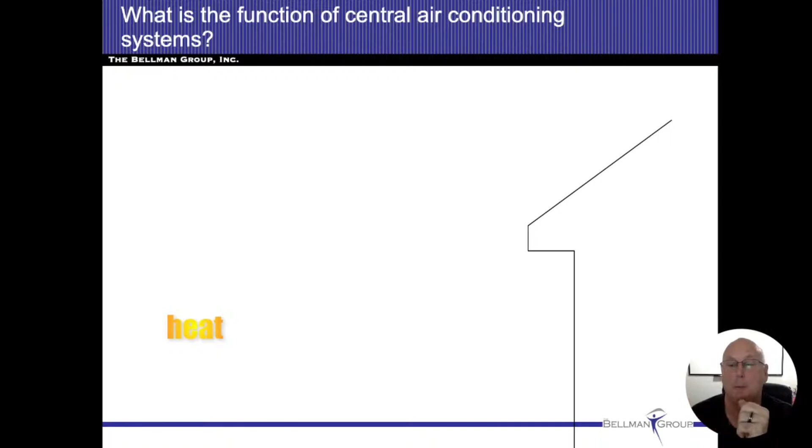So a lot of what happens with air conditioning, the main goal is we want to absorb the heat from inside the house, and then we want to move that heat to the outside of the house, and the result of that is going to end up being we feel cool inside the house. All right, so how do we do that? We have to do a little bit of science.

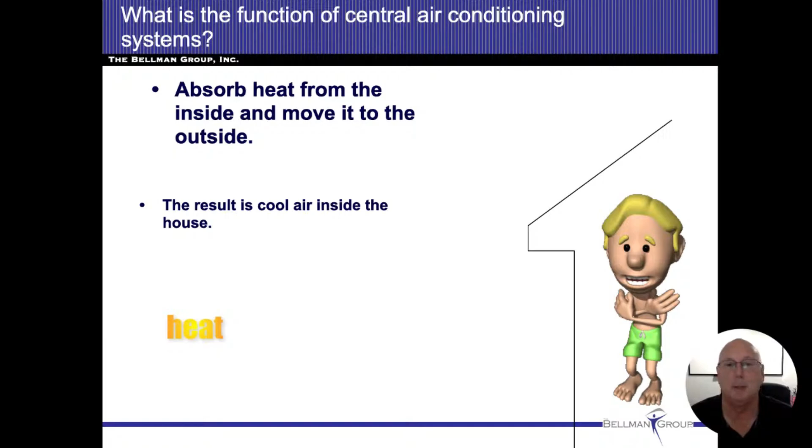Believe it or not, the guy that invented air conditioning, I believe his last name is Carrier. So, obviously they named the air conditioning company after him. I believe his first name is Marcus. Marcus Carrier. Either that or it was a safety for the Bears. One of the two. But either way, we'll keep working.

So heat does move. Heat is always moving from whatever the warmest object is to the coolest object. The bigger the separation between the temperatures, the faster the heat's going to move.

If I am in a room of 75 degrees and I have a glass of ice water with me, the ice water is going to be 32 degrees. But that heat, that's 75 degrees in the room, is going to continuously be absorbed into the liquid until that ice is completely a liquid. Then that's also going to start raising in temperature until both temperatures are going to be the same. So either the liquid's going to end up being 75 degrees or so forth.

Now the second one is kind of important. We talk about BTUs, and I do want you to be able to write that down real quick. I'll come back to this screen.

Oh, Willis Carrier, thank you Mark. Sorry, so Marcus Carrier was the Bears player. So Willis Carrier is the inventor of air conditioning. Oops, that's okay.

Let's. Oops, I did not want to do that. Sorry guys, I'm having... there we go, all right.

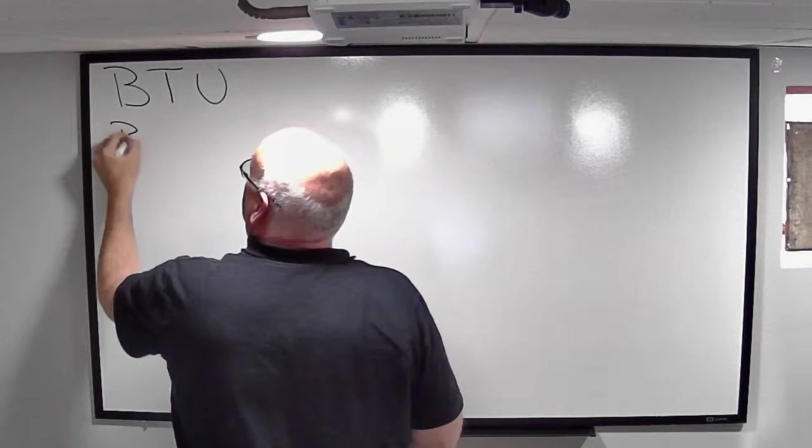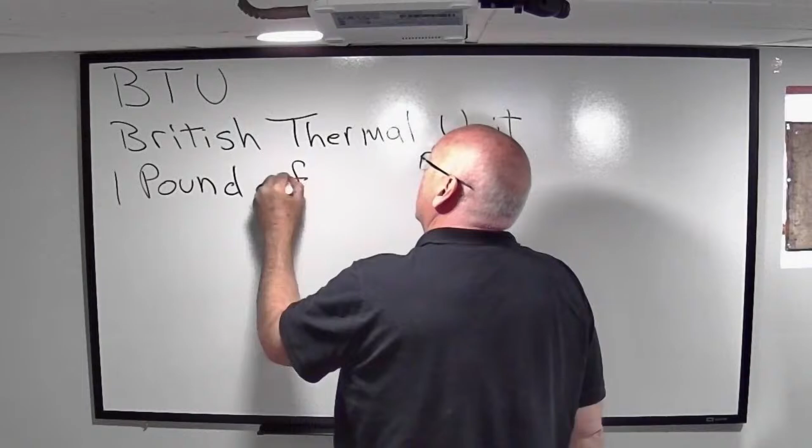So let's start writing a few notes on here. All right, we do need to know the definition of BTU. That stands for British Thermal Unit. I guess I would have been better off going up and down on this one. But British Thermal Unit is the amount of energy, whether it be coal, gas, water, whatever it is, that's required to raise 1 pound of water 1 degree Fahrenheit.

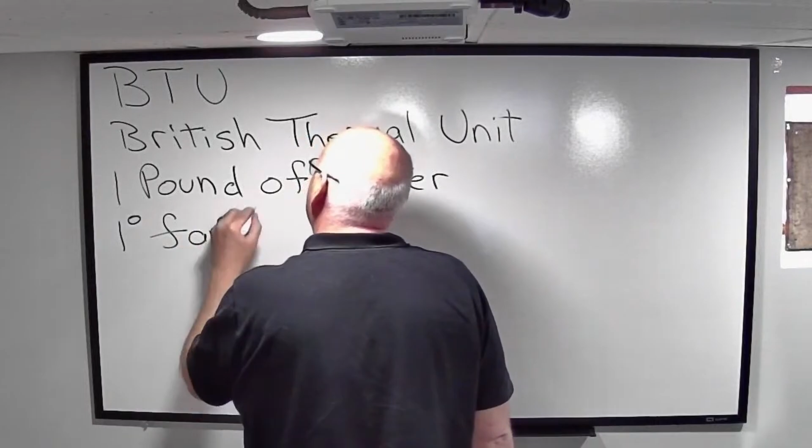And I know I'm going to spell Fahrenheit wrong. Well, maybe not. 1 degree Fahrenheit. So I usually go through a little bit of a thing here where, let's see, I'm going to get me back on the screen here. There we go.

All right, so I usually go through a little bit of a thing where: how much energy are we needing when we start raising temperatures of water? And a lot of these questions I keep asking are, if I had 1 pound of water sitting in front of me and I want to put that on a stove and put a fire on it, how much gas am I going to need to raise that temperature 50 degrees?

FAH. Mark, I'm going to stop liking you real soon. But anyway, I hope you're giggling at that.

So 1 pound of water, 1 degree Fahrenheit. If I have 1 pound of water that's 50 degrees, and I want to raise it and make it 100 degrees, I hope we're realizing I have to add 50 BTUs to that. And that's how long the fire has to burn and how much gas needs to be used.

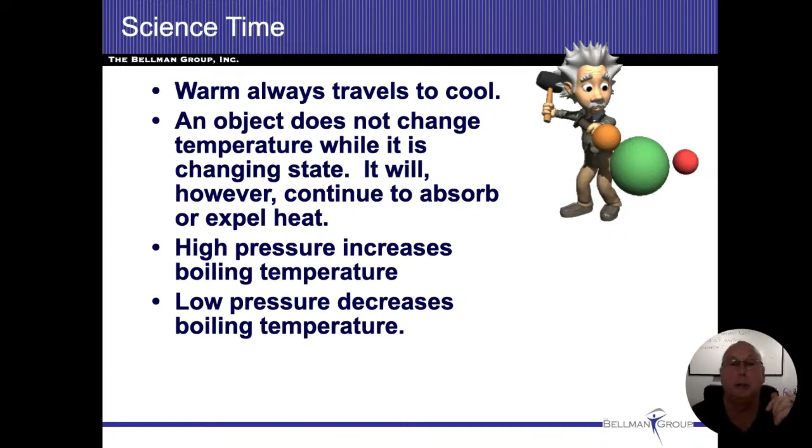All of these items work with our air conditioning system. In a nutshell, that's how the refrigerant works.

So we're going to bring a cold liquid inside the house. Remember, we have to absorb the heat. So if we bring a cold liquid inside the house and blow warm air over it, we're going to absorb that heat. Heat travels from hot to cold. So if it's warmer inside the house than in the liquid, heat is going to move through the radiator coils into the refrigerant and convert that refrigerant from a liquid to a gas. As it converts from a liquid to a gas, it has to absorb a tremendous amount of BTUs. And I need you to remember that part - it absorbs a tremendous amount of BTUs.

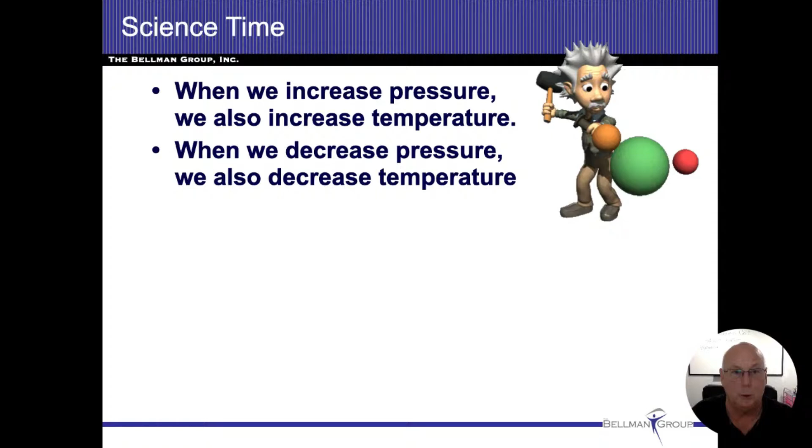And even on the other end, when we're discharging the heat, we're switching from a gas to a liquid. When we switch from a gas to a liquid, we're discharging a tremendous amount of BTUs. So in short, this is our typical air conditioning system. I'd like you to realize there are basically 4 different components that come into play here. So let's start over here at the compressor.

We'll start at the compressor. You can see that on the lower left-hand side. So inside we have our furnace, our air handler. You can see our air conditioning coil on top.

I know I put the blue flames on there. I'm sorry, I just thought they were cute, so I put them in there. But for the most part, the furnace isn't going to be running when the air conditioning is running. It kind of defeats the purpose.

So we'll start at the compressor. That compressor is going to have a gas, and it's going to compress the gas. Once we compress the gas, we raise the temperature, usually up to somewhere around 150 degrees. If it's really hot outside, let's say 100 degrees, the refrigerant's going to be 150 degrees and the outside air is going to be 100 degrees.

So the heat is going to be transferring from the refrigerant to the outside air. As we go through these coils up here, that discharges the heat under high pressure. So the boiling point is up at the top, and it's going to convert to a liquid. It's still going to remain high pressure, but it's going to end up being a liquid.

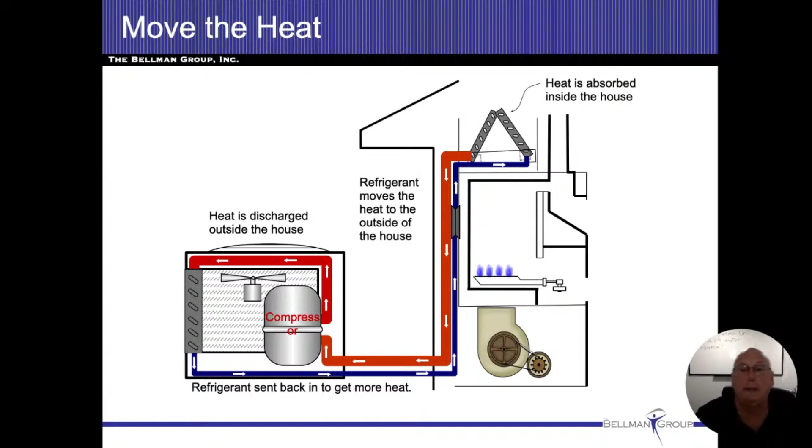But I think it's still a good idea to break down the air conditioning system and just get a clearer understanding. So how do we get the heat basically from the room air or the outside air - how do we get it to the refrigerant?

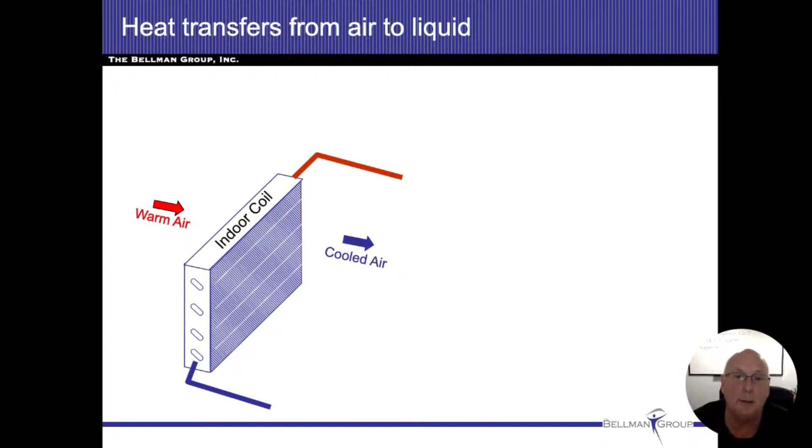So if we look at the outside coil, you can actually see these fins because they're out in the open. They're very tight together, thin pieces of metal attached to the coils. Those coils run back and forth throughout everything, and the fan blows the air over them. So these big, wide, narrow pieces of metal let air flow in between them, able to absorb a tremendous amount of heat as the air passes through, or discharge the heat as well. So it makes it pretty efficient.

So that's how we're absorbing the heat and getting it into the refrigerant. The more times that coil passes over more air, the more heat it can either absorb or discharge. At this point, we're talking about warm air going over the coil - it ends up absorbing the heat into the coil, and then cool air is what we feel coming through the house.

The problem with these coils - these fins - is they're so close together that there's always condensation forming on them. If we let dust get past the filter and onto these coils, it starts creating a layer of mud. And once that layer of mud is created, especially with forced air furnaces that we have in the Chicagoland area, we really don't have access to the top side or bottom side of these fins to clean them.

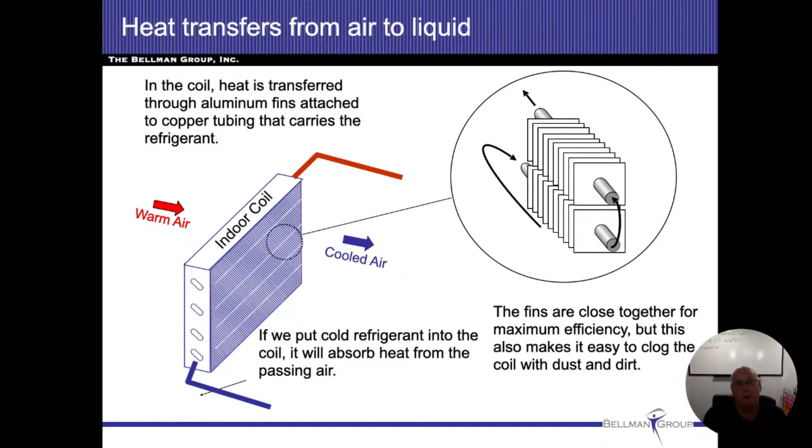So now we're going to have to hire somebody to basically remove the coil, get to the underside, and clean all these things just to let the air pass through. Because if the air cannot pass through, then there's no way to absorb the heat from the house and put it into the refrigerant - everything just stands by there.

A key phrase I want you to be aware of, please write it down. It's called the latent heat of vaporization. We actually talked about it already. That's the latent heat, the process of absorbing or discharging significant amounts of heat when changing state.

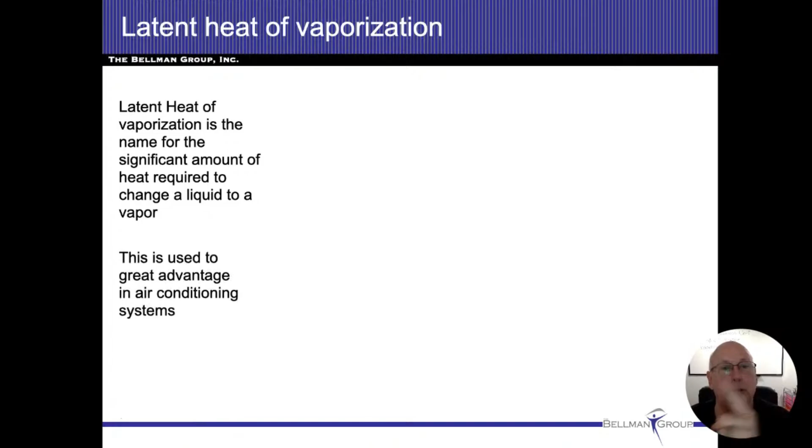Going back to the BTUs, we talked before about if I add heat to something, it changes from a liquid to a gas. If I discharge heat or remove heat from something, it changes from a gas to a liquid. So the first one, going from a liquid to a gas, that's latent heat of vaporization. It takes about 1,000 BTUs to take that 1 pound of water and completely convert it over to a gas.

The other term I want you to know is latent heat of condensation. Latent heat of vaporization is the amount of BTU transfer when I go from a liquid to a gas. Latent heat of condensation is the amount of heat transfer going from a gas to a liquid. It's a tremendous amount of heat that we can absorb or discharge, but I need you to know when we're absorbing and when we're discharging.

For me, it was always easiest to remember that pot of water on the stove. If I got a fire underneath that stove, fire underneath the water, that water is absorbing heat. As I'm absorbing heat, I'm changing from a liquid to a gas. And then vice versa, if I'm removing the heat, I'm going from a gas to a liquid.

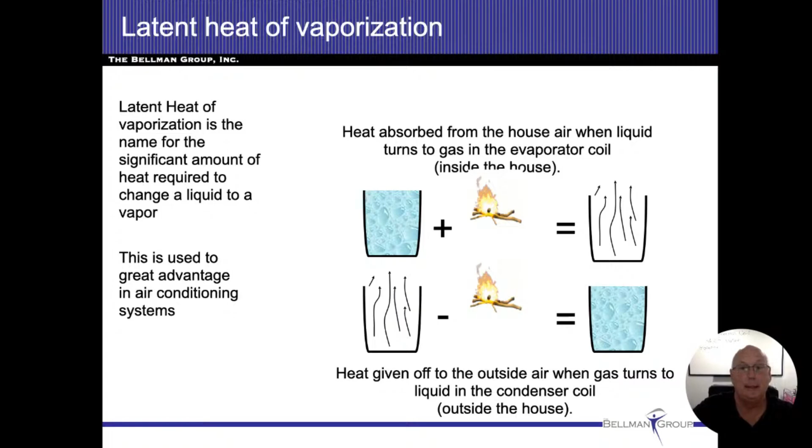Latent heat of vaporization and latent heat of condensation. The evaporator coil, we really give two names in air conditioning: a condensing coil and an evaporator coil. If you think about what I just talked about, when we're evaporating, we're changing from a liquid to a gas. And when we're condensing, we're changing from a gas to a liquid.

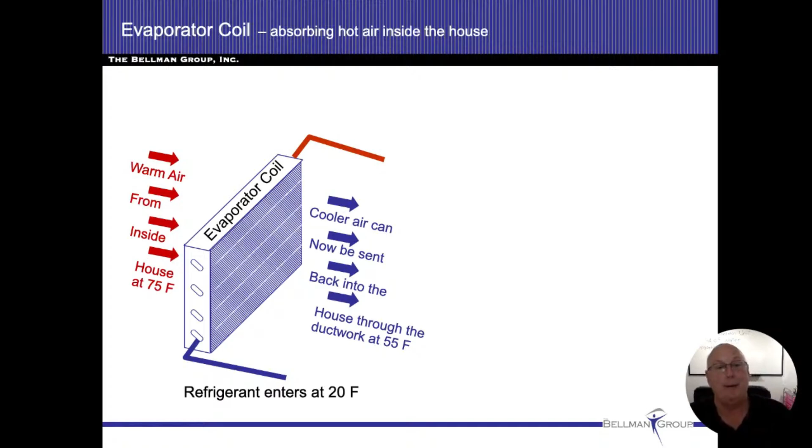So refrigerant enters at about 20 degrees Fahrenheit. I think that was the first number I threw out there. We're going to assume that the house is somewhere around 75 degrees. This is a simple test we can do as well. It's going to change from a liquid to a gas, and as it changes, it's going to absorb the heat in the air that is blowing over the coils where it comes through. So it comes in as a liquid at 20 degrees, absorbs heat from the house, and then the refrigerant ends up leaving as a gas roughly about 50 degrees.

Now going back and showing the lines again, we didn't really talk about the line set, but if you look at your air conditioning system, you're going to see two tubes out there. We call that the line set. One is going to be skinny and one is going to be fat, or bigger. The bigger line is also known as our gas line or our suction line or our low pressure line. That one's going to be cold to the touch. We're saying it's going to be around 50 degrees when we touch it. So if our hand is on it and we feel it, it's actually going to be pretty cool.

Where it's a liquid coming in here is going to be after the restricting device. That's going to lower the temperature down to 20 degrees. That's not going to be an area that we can actually touch. That's going to be inside the plenum or the air conditioning coil. Typically it's going to be the capillary tubes, but we'll get to that in a little bit.

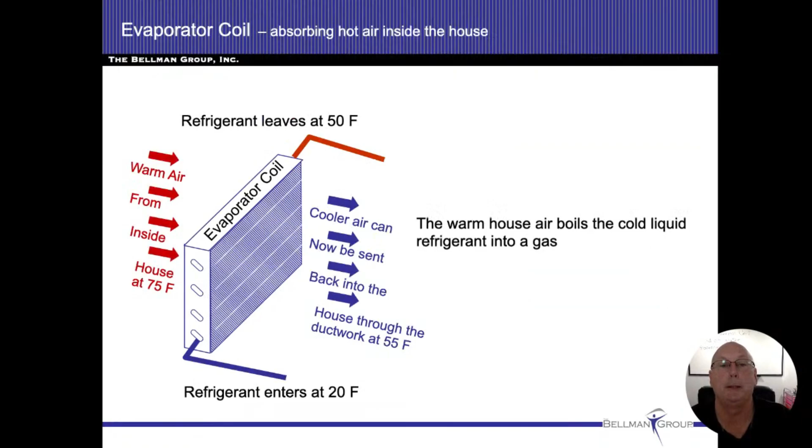So let's go back here one more time. I want to pop those words back up there again and make sure we got everything covered. So warm house air boils the cold liquid. We chatted on that. Large amount of heat is absorbed. That's a test question, I need you to be aware of that. The heat that's being absorbed is called latent heat, and we're going to refer to this process as latent heat of vaporization. When we're discharging the heat, as we're changing state, that's latent heat of condensation. And again, it does make for a very efficient heat transfer.

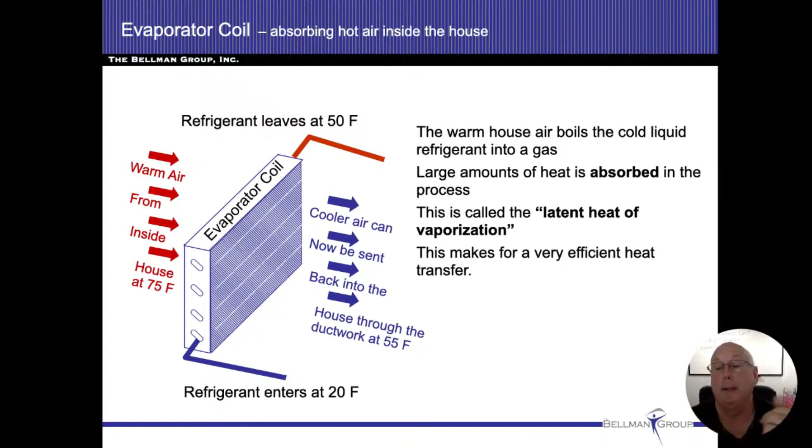So we have our indoor coil. We were just talking about that. We left the indoor coil as a gas, and it's 50 degrees. We said heat travels from hot to cold. So if it's 100 degrees outside and my refrigerant is 50 degrees, the outside air is still going to be putting heat into the refrigerant.

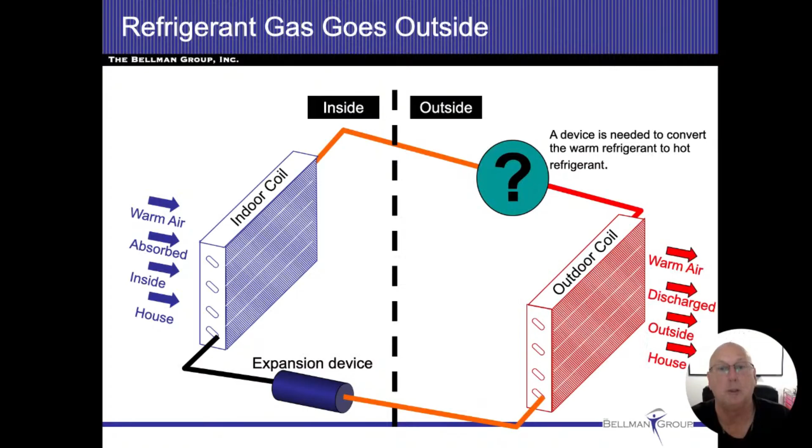So I need to do something with that gas refrigerant to increase the temperature of it. We mentioned earlier in our science discussion that when we increase the pressure, we're also increasing the temperature. So this is just an old piston-shaped pump here.

Right now we use scroll compressors in the system. But if it comes in as a gas, the only thing that can go through these air compressors is a gas, and we're going to hit that with the temperatures we check in air conditioning in a bit. So we can only send gas through the air compressor.

It comes in at 50 degrees, but once I pressurize the system, it's going to leave at about 150 degrees. So just by pressurizing that gas, we increase the temperature by 100 degrees. Now it's warmer than what it is outside, and this air compressor is located in the outside compressor cabinet, or condensing cabinet. It has a couple different names, but it's really the same thing. So the air compressor is in the outside metal cabinet.

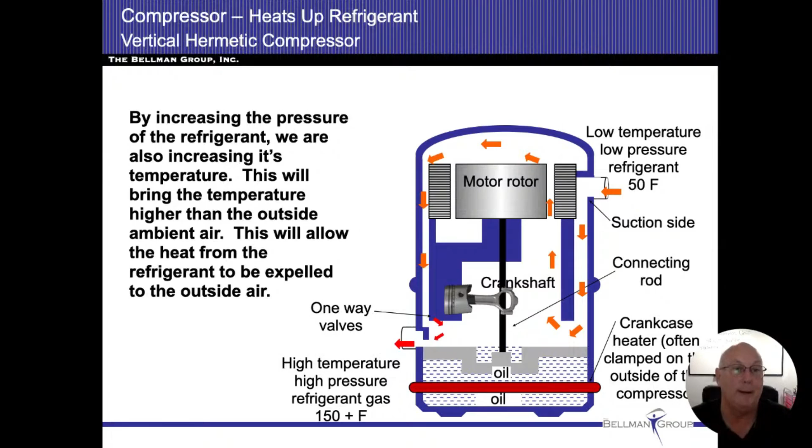As it leaves there, it's 150 degrees. When it's 150 degrees, it's warmer than the outside air. So as we run it through all the coils and fins that are outside, we're going to start discharging heat to the outdoors. So as we discharge the heat, it comes in at 150. Here we're saying it's 85. Outside air is going to probably go up about 15 degrees.

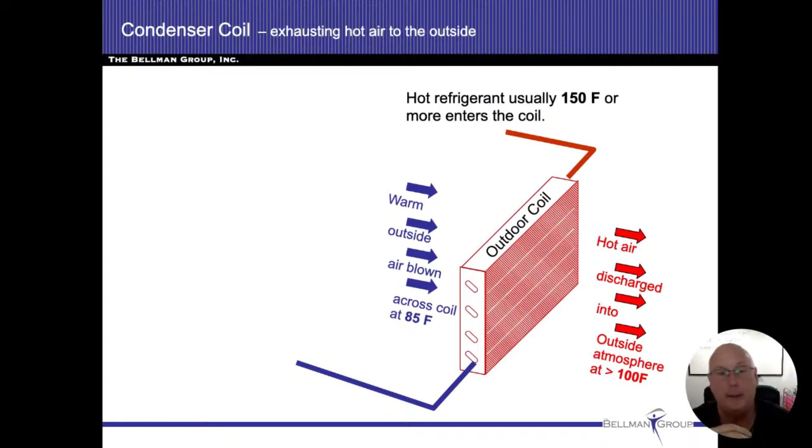And I did leave that off indoors. I want you to remember that air conditioning systems typically have a 15 to 20 degree temperature drop. That's a real simple, easy test we could do to see if these things are basically doing what they're supposed to. We turn the air conditioning on. If it's 70 degrees in the house, we should expect it to be 50 to 55 degrees on the other side of the air conditioning coil in the plenum. Anything higher or lower than that could be an issue.

High pressure liquid, because we raised the boiling point, leaves there at 100 degrees. So the skinny line is going to be warm to the touch, and then the suction line, before it goes into the cabinet, remember that 150 degrees is directly after the compressor. Before the compressor, it's 50 degrees. So what I'm able to feel is the suction line on the outside is 50 degrees, and the liquid line on the outside is typically 100 degrees.

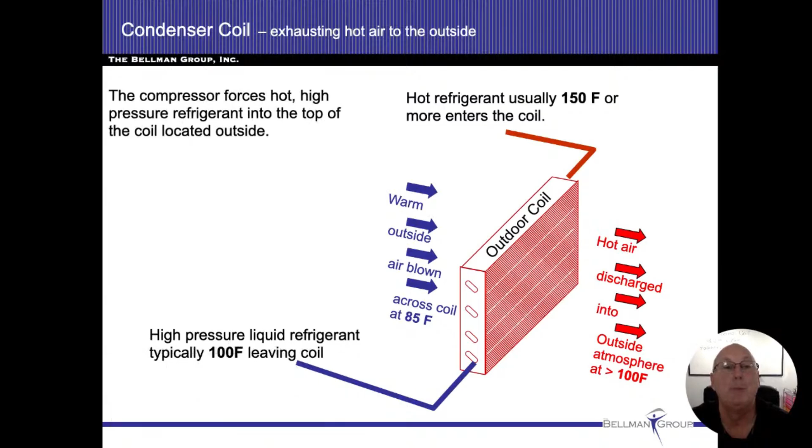This forces hot, high-pressure refrigerant to the top of the coil located outside. The refrigerant travels through the coil. The same air transfer is happening, but in this case, we're discharging heat. As I'm discharging, I'm condensing my refrigerant, changing from a gas to a liquid. And again, as I change from a gas to a liquid, I discharge a tremendous amount of heat that I had inside the refrigerant. This is called latent heat of condensation when this happens. And we're just talking about the heat transfer without the temperature change. That is latent heat.

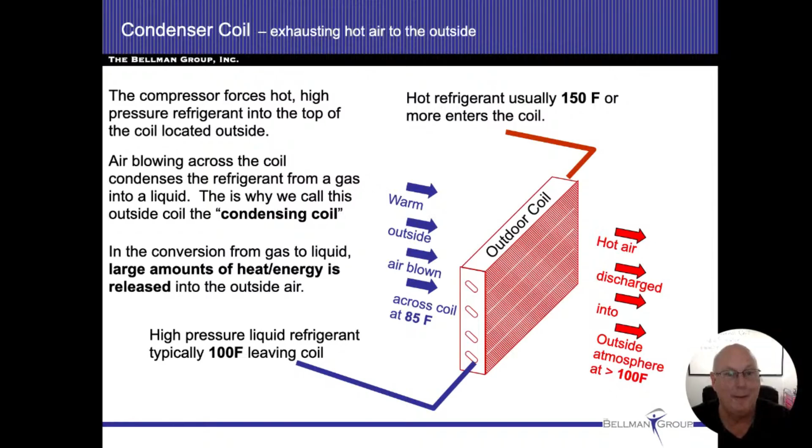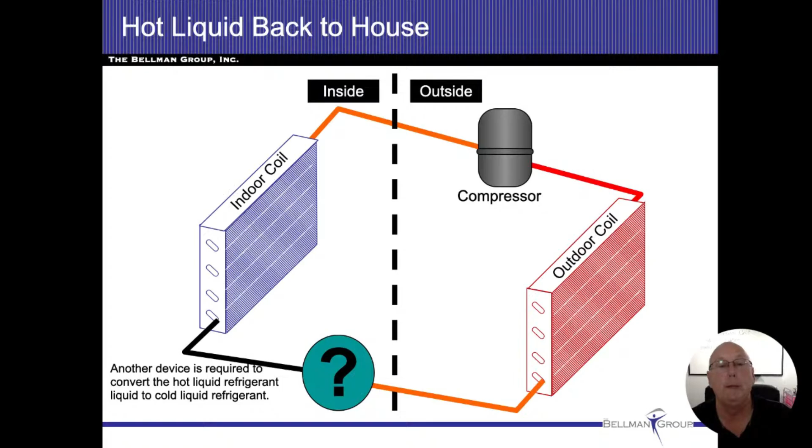So we started at our indoor coil again. We absorbed heat, we're a gas. We send the gas to the compressor. We compress it, now we make it a high temperature, high pressure gas. We blow outside air over it. We get rid of that heat. It changes back to a liquid. It's still high pressure, but now I need to lower that pressure, because when I lower that pressure, I'm going to lower the temperature as well, so I can bring a nice cold liquid into my indoor air.

So the capillary tubes, and I'll show a picture of that in a bit, are going to be our typical bottleneck, our typical restricting device or metering device. There are other ones out there, mechanical devices called TXVs, or thermal expansion valves, and I'll show you what those look like and how they work in a bit. But for now, I want to focus on the science behind the air conditioning.

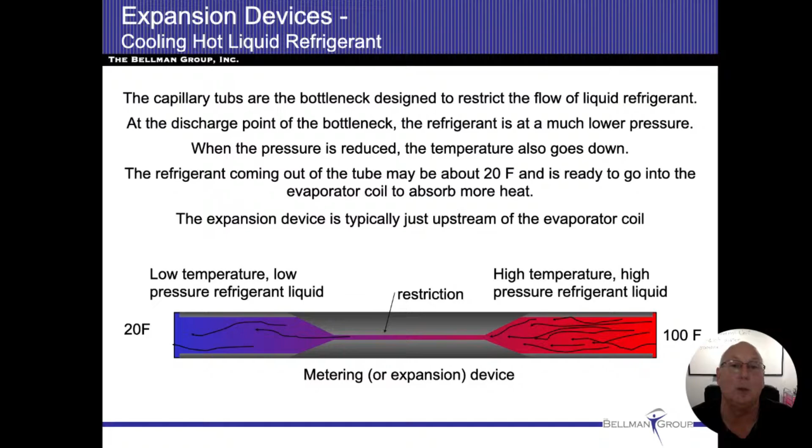So what we're doing is we're holding that pressure back, and as we hold that pressure back, we have that 100-degree temperature. Then as we let a little bit of the refrigerant out, we lower the pressure, which significantly drops the temperature as well. As we drop that temperature, that's what we're going to be sending into the air conditioning unit. So now we have a 20-degree liquid, and we're going to bring that liquid inside.

So the outside cabinet and the size of the compressor and the size of the coils have to match the indoor refrigerant coils as well. They can't be like a 4-ton unit outside and a 2-ton unit inside. They must match, otherwise they're not going to work properly.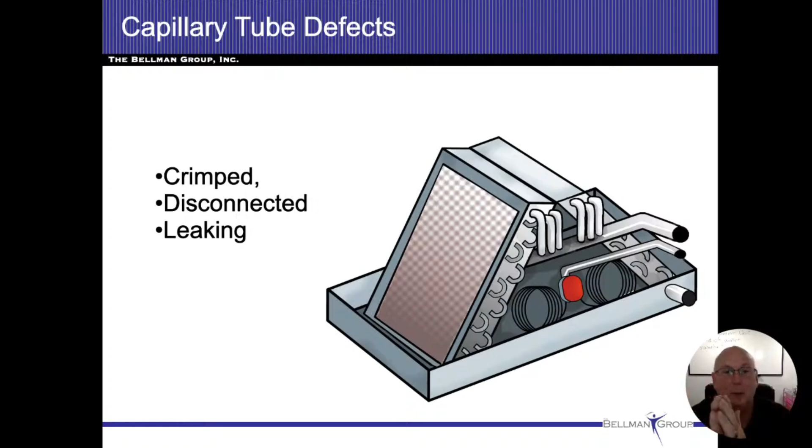So if we ever get inside, sometimes you'll see a panel on the indoor coils, so you could pull that panel off. Sometimes you can see it when you remove the humidifier, and you can look for these coils. Typically, we don't find too much going on with them. But if they're leaking, you'll see signs of oil, and we wouldn't get our temperature changes anyway, or if they're dented or damaged in any way, we should photograph them and document that as well.

Here's an actual A coil. You can see how the skinny line, we call that the liquid line, goes into those capillary tubes again. The spiraling of the capillary tubes is what's going to hold everything back. And you could see the fins.

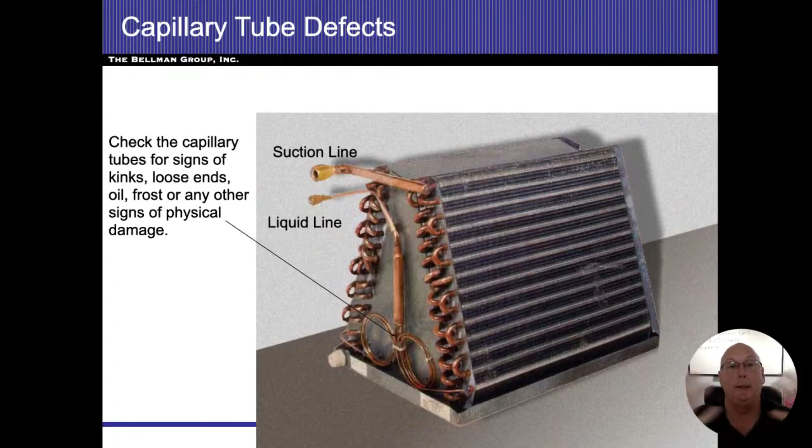I like this picture a lot because we can actually see the coils and how they're going back and forth, and the fins, how they tighten and keep the air coming through. Then it leaves through the thicker line up there, called the suction line. So it comes in as a liquid and leaves as a gas, as we absorb all the heat that's inside the house and put it into the refrigerant.

We're going to have our indoor coils and our outdoor coils. We're going to have a compressor, so something to increase the pressure, and then something, whether it's the capillary tubes or a TXV, for a generic term we're going to call it an expansion device. So we're going to have something that's going to lower the pressure, or a metering device. I like that as more of a generic term as well.

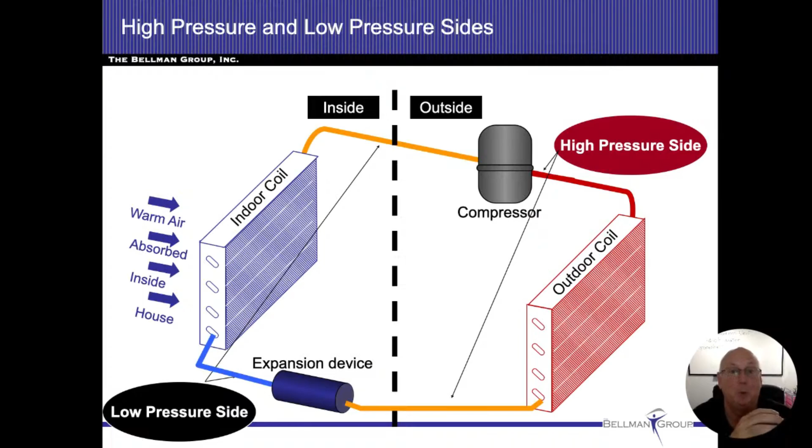So I'm expecting you to know when it's high pressure gas, when it's high temperature gas, when it's high pressure liquid, when it's medium temperature high pressure liquid, and then after the expansion valve, we're going to be low temperature, low pressure liquid. As we go through the coil and change to a gas, we're going to be medium temperature, low pressure gas. Then we hit our compressor again: high temperature, high pressure, still a gas, and it changes state in the outdoor coil back to a liquid.